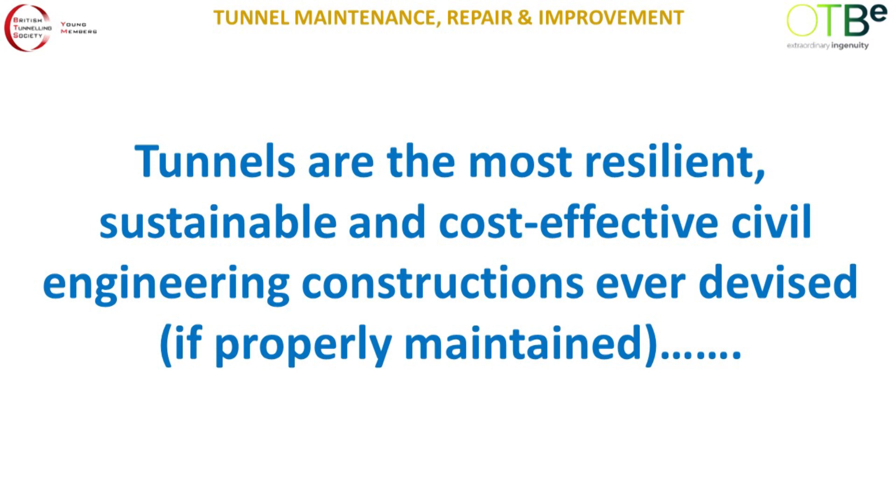So I'm going to start with this statement. It's a pretty bold statement, but it's true. I don't know if you've ever thought about it: tunnels are the most resilient, sustainable and cost-effective civil engineering constructions ever devised, provided they're properly maintained. Not many people think about that. It'd be interesting to know how many tunnels have been built for civil engineering purposes throughout history and are still being used, or are still capable of being used. I'd think you'd find it's a remarkably high percentage.

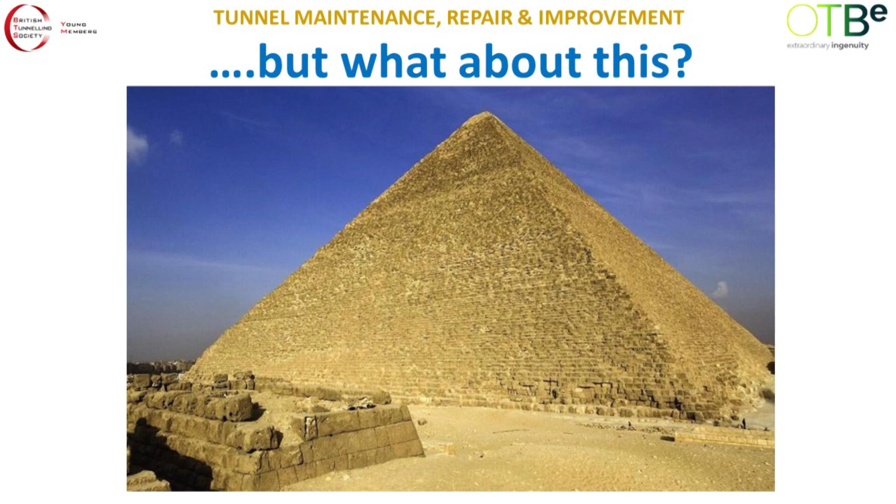But then what about this? It's a pretty bold statement, but what about that thing there? It's pretty old, it's pretty resilient. I wouldn't say it's particularly economic, but there it stands. What about that? Well, it's got its own tunnels, and because the tunnels are underneath the Great Pyramid, they're probably older than the Great Pyramid. It's quite a large cavern, and you can see they've been around for 4,500 years, and they've hardly been maintained at all, and they're still in use as tourists and archaeologists still use them.

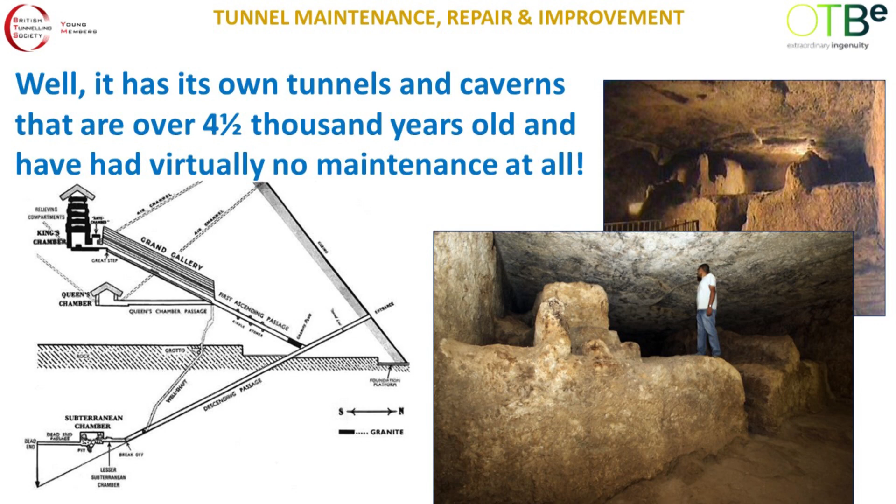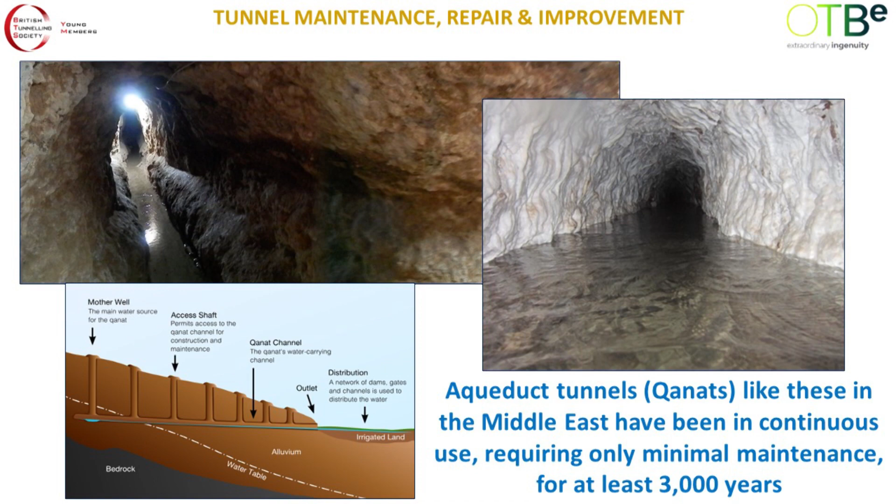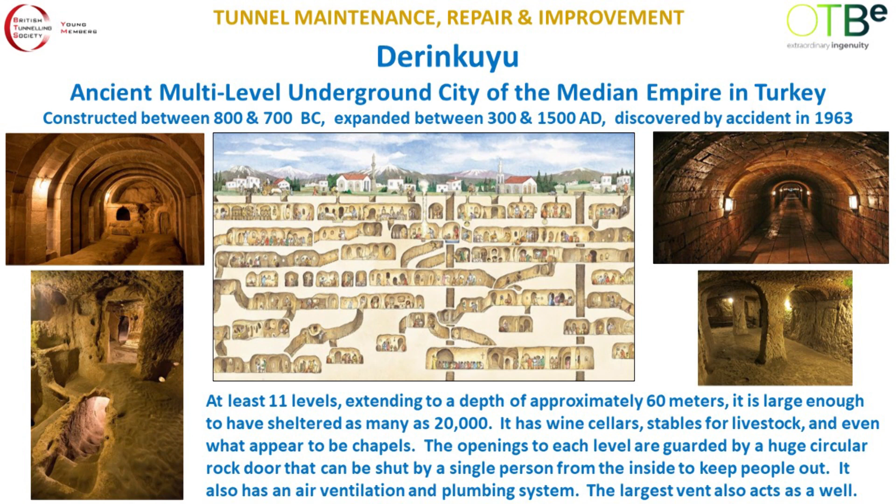And then there's this - there are other examples besides this, but this is a 2,500-year-old underground city, a complete underground city in Turkey that's still capable of being inhabited. It's capable of sheltering as many as 20,000 people. It's got a full ventilation system, it's even got its own security doors. It's an amazing thing, and it's still almost as good as the day it was built.

So those are ancient ones. Let's come a bit further up to date. Let's have a look at this country in particular, since we invented tunnelling - there you go, get that out of the way.

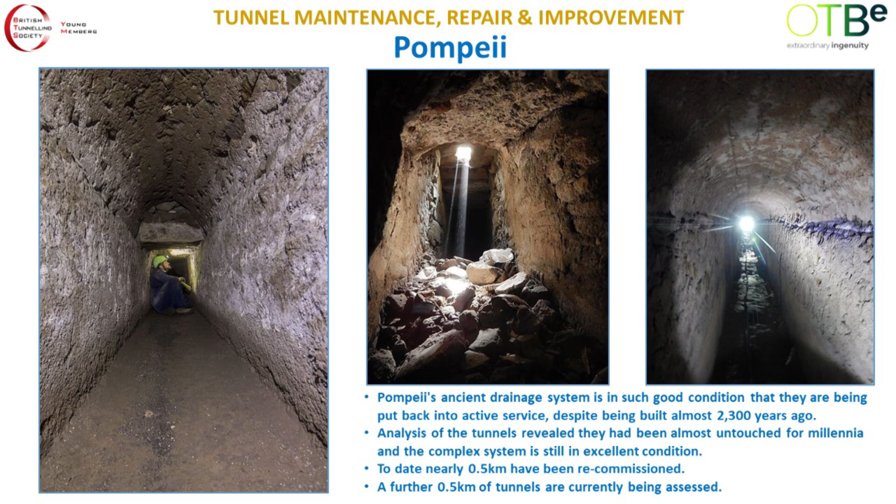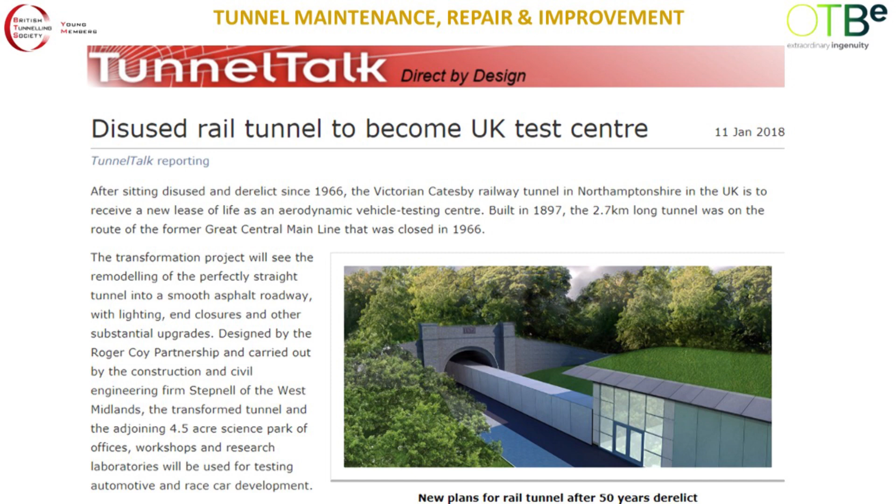This one, I don't know what the status of this is. This was a report in TunnelTalk in 2018, converting this tunnel into a vehicle test centre. I don't know what status that's in at the moment - maybe because I'm a little bit out of the business, having retired, so I don't really follow whether these contracts are coming up. But certainly, it looks like it's a goer, that one. Worth keeping an eye on.

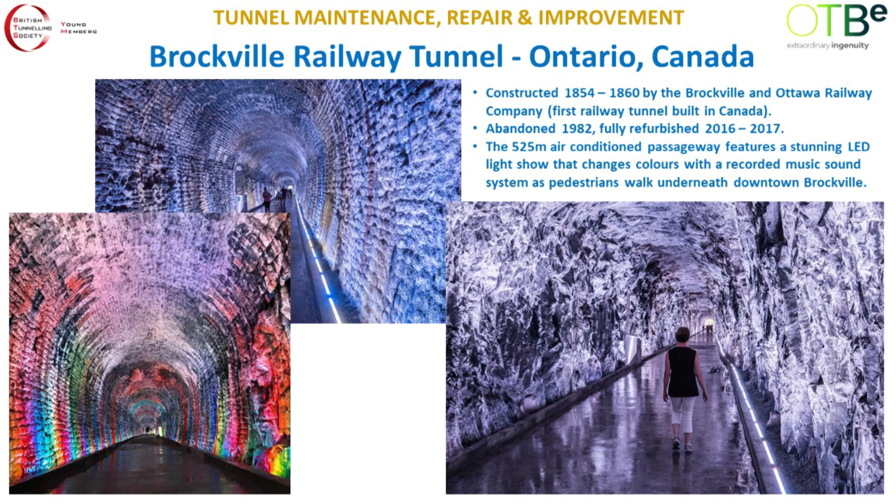That collapse - I went to see it - chimneys almost to the surface. If you look right up into the top with a strong torch, you can actually see the foundations of the terraced house above. They were really lucky in that house too. In the end, this was just infilled with concrete and abandoned, which is a pity really. It's still there, still possible it could be refurbished, and they are talking about refurbishing the old underground line as a new metro for Liverpool.

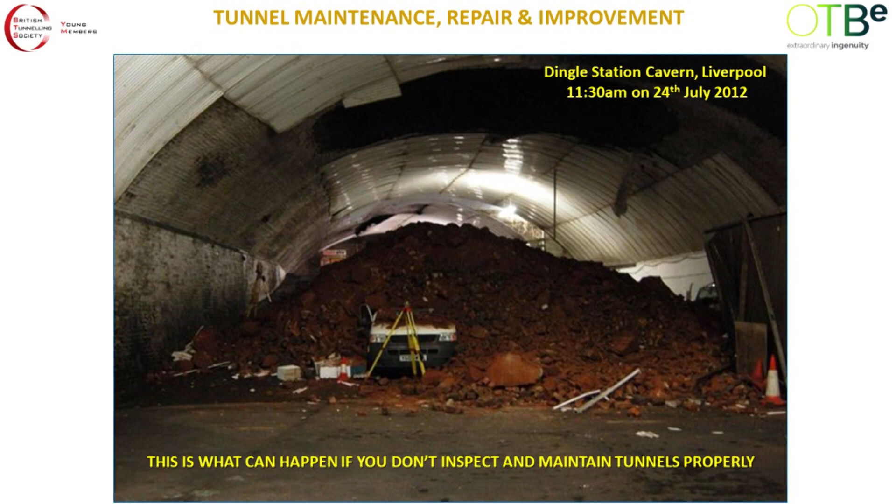So let's have a look at how these tunnels were built. The older tunnels were all built using, almost if they could get away with it, no support at all - just dig the hole, or some very minimal type of support. More commonly stone masonry or brick, sometimes terracotta, used mostly for the finishings. Brick and terracotta with mortar, just plain mortar often used - often Roman mortar or lime mortar. Certainly the brick mortar was often lime mortar or Roman mortar.

Unreinforced concrete came along late in the 19th century. And of course most of London Underground is constructed with grey cast iron, not spheroidal graphite iron, SGI - it's mostly grey, which is much more brittle than SGI. Or this traditional one, steel ribs and lagging, sometimes referred to as colliery arches. We'll have a look at that later.

So these could be used in combination, but often this timber support is left behind. When they put the brick arch in, they can't - it's very difficult to take the timbering down to get the brick in. So quite often they left it in there and just packed stone and rubble around it. Now that this stuff has rotted away, all the weight comes on the brick, and that's probably one of the reasons why the Dingle tunnel collapsed.

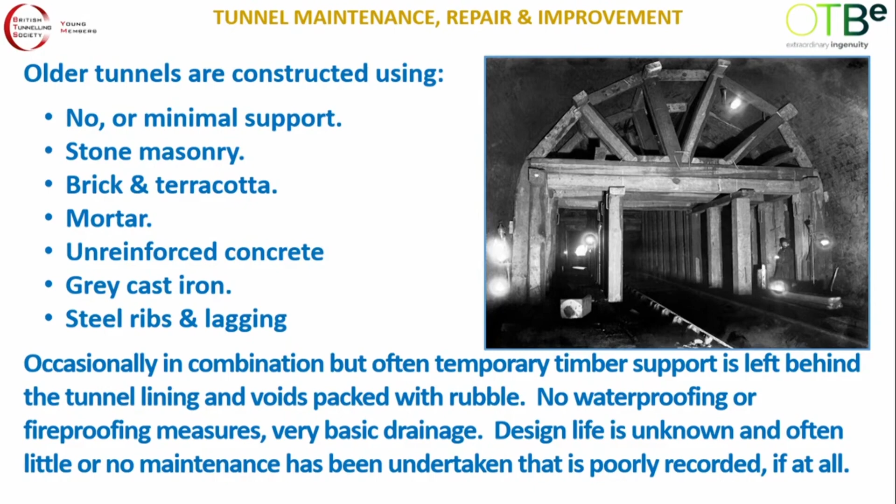Again, often in combination, often with some ground stabilization, much more sophisticated waterproofing, drainage, fire protection, usually designed for a minimum of 120 years in civil engineering. Often requiring only basic maintenance - they're built pretty well in the first place. But sometimes they do employ some of the old methods, like steel ribs and lagging as temporary support - still used, although particularly in America, actually, oddly enough.

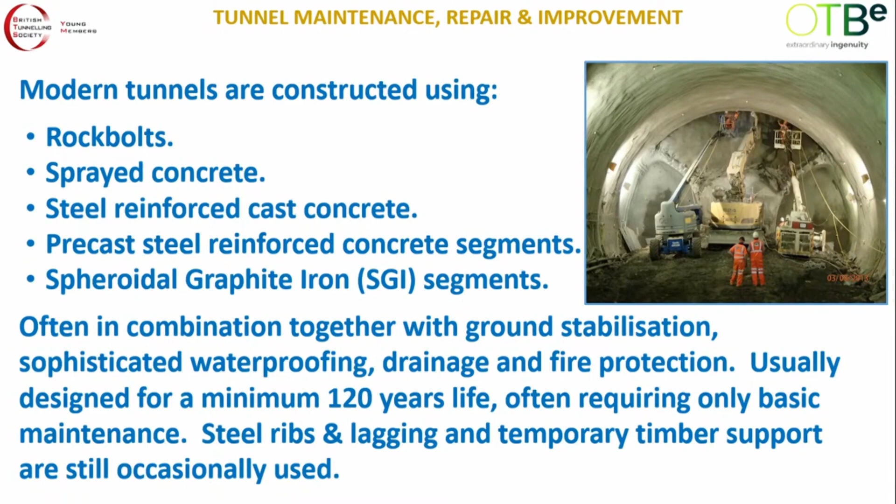So in terms of maintenance and inspection, most of the utilities have their own methods of doing it. Some time ago, the CIRIA organization, along with these good people - some of them have gone now, Metronet have gone, but certainly HSE, London Underground, Tube Lines have gone, Network Rail is still there - put together from their own methodologies this compendium, and it's pretty good. I think WS Atkins actually did the donkey work on it.

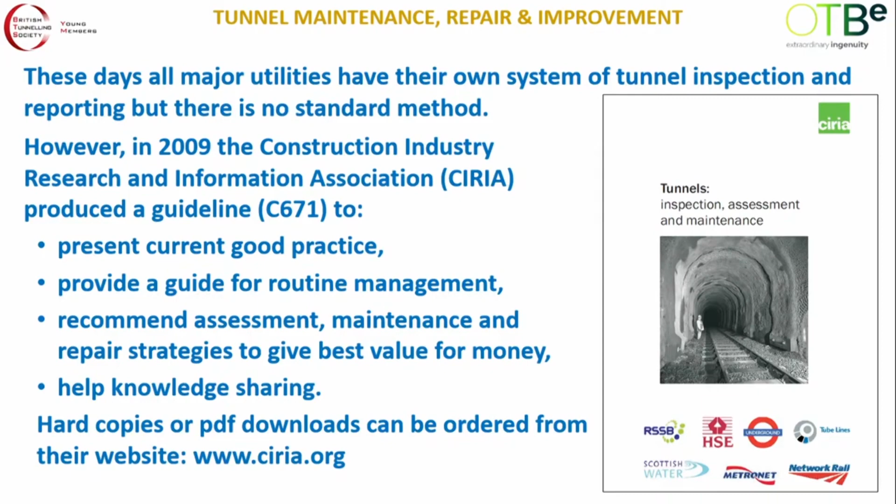But it presented good practice guides for routine management, assessments, knowledge sharing. You can download this as a PDF - it's quite a thick tome, about an inch thick - or you can have a nice paperback copy for your shelf from this website. I recommend that if you're going to get into this part of the profession, to have that one on your shelf or on your computer. Here's a typical maintenance inspection report - this is a typical Network Rail version of it.

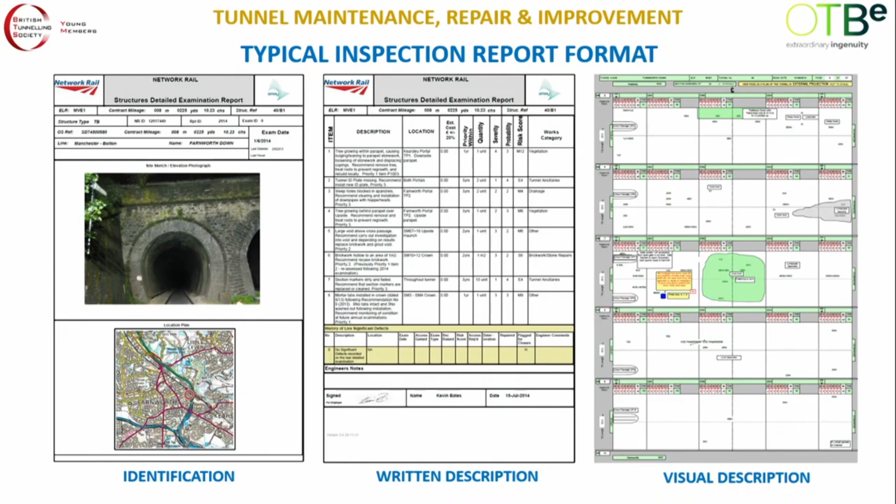Here is a visual report with a sort of scorecard here. Here is a sort of graphical version. There's a developed plan view where you've got the crown and the side walls and the invert.

More recently, these visual inspections are supplemented by things like radar scans, LiDAR, and laser. You'll see that increasingly, and these are getting so detailed now that they're almost like photographs. You can get measurements to less than 1 millimeter now with these.

Profile surveys - they used to use, in the old days, what they called a trammel, which they'd just push in there, like a frame, and measure offsets from it. But now it's done with total stations, theodolites.

Obviously, you need to know what the condition of the lining is, so you do some core drilling through the brick lining. See how many bricks thick it is - has it really got 3, 4, 5 courses of brick? And more particularly, what's behind the lining? Quite often, there's nothing behind the lining. It's just a void, or it's just rotten timber, or it's just rubble.

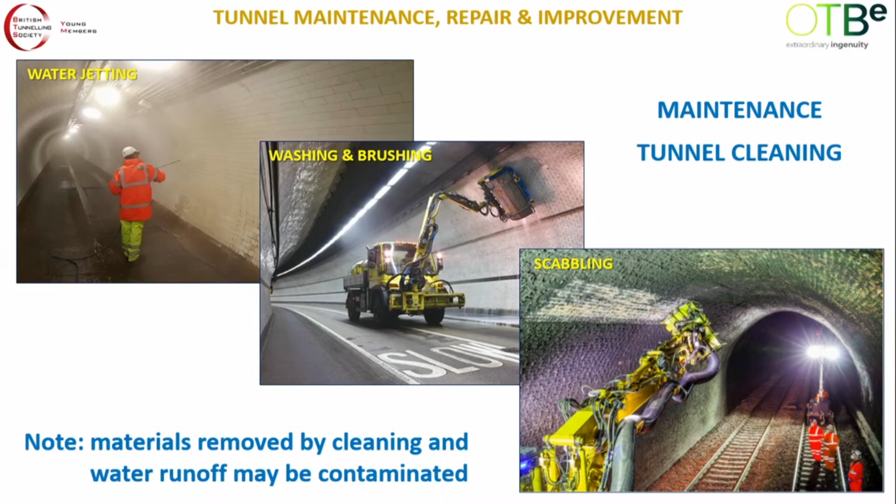This is a new sort of idea with the railway tunnels. This is soot - 100 years of soot accumulation, and of course it covers up the condition. You don't know what the condition of the brick is, so you have to actually scabble the soot off. The soot can be a couple of inches thick, and the problem with that is it's carcinogenic.

So this machine is actually a great big Dyson vacuum cleaner as well, because you have to be careful that if you're cleaning a tunnel, the material that's being taken off and the water runoff can well be contaminated, and you could get into deep trouble if you chuck it into a watercourse.

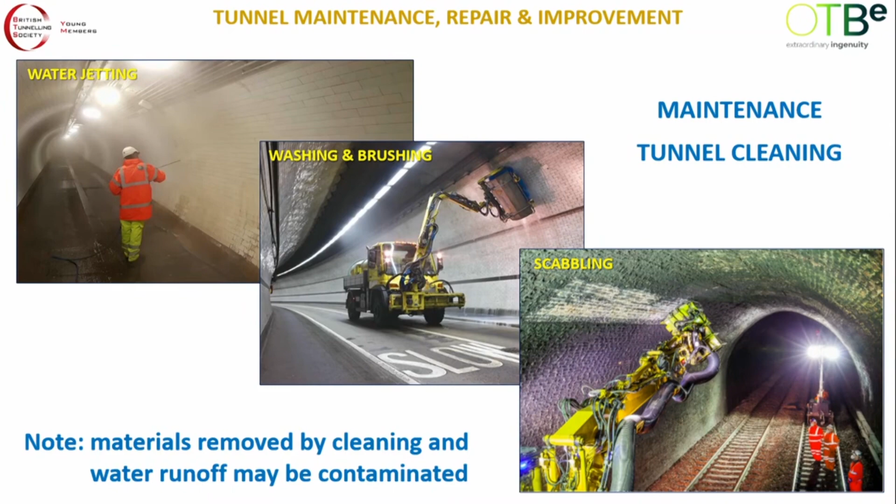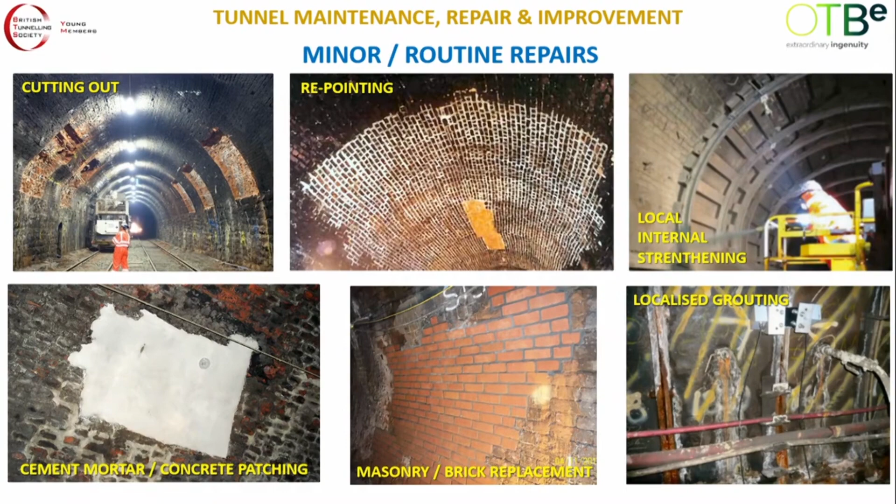Repairs - well, let's look at the minor repairs. Just cutting out the brick. So if you've got more than one layer of brick, well, we can cut out a layer and the tunnel's not particularly compromised. You do it in windows, so at least you do that, and then you infill that and then do that and so on. You wouldn't knock out an entire strip of a course of brick - you'd destabilize that inner lining.

Repointing - just simply repointing is probably good enough. That's done an awful lot on Network Rail.

If you cut out the brickwork, well, you can infill it with cement mortar, or even concrete, or fibre reinforced concrete - that's the main flavour of the year. This fibre reinforcement is very good. A problem with this can be shrinkage, so you want a low shrinkage grout, and the fibres definitely help there.

Or if you're feeling really flush with money, you could actually put new brickwork in there. Certainly, if it's in an area where it's visual, where there are people walking along.

A bit cruder than that may be internal strengthening. These are ribs and lagging, and then it's being shotcreted. But it's only an internal sub-local solution over a short distance. They can get in and do that pretty quick.

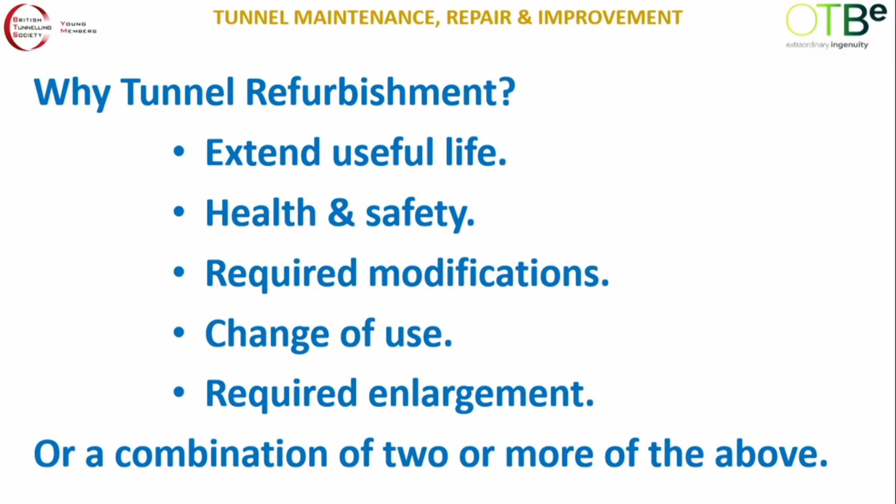Why would you enlarge the tunnel? Well, if you're going to electrify the tunnel with overhead lines, you need space in the soffit, and there may not be any, so you've got to enlarge the tunnel. Or it could be a combination of any of those.

So how would you go about doing it? Well, under the heading of strengthening, fill the void behind the lining - best to fill it up, and the way to do that is to grout it. You could put internal support inside the tunnel, but the only problem is that reduces the gauge of the tunnel. So if all your support's on the inside, you may not be able to fit the train or the traffic through there.

Ground anchoring - some big examples of that have happened, particularly the Severn Tunnel, a huge contract for ground anchoring before they could reopen that tunnel. And underpinning, strangely enough - you wouldn't think you'd do that with a tunnel, but it is done. We'll have a look at some examples.

Relining - you've got a pretty good arsenal these days for relining. You can use spray concrete. This is a specially designed carriage where the guys applying the shotcrete are protected from the live railway alongside it. When they're actually working, the ends are screened off as well - you can see the bag is inflated at the top, and these flaps come down, so the thing is sealed off and the guys are working in safety. That's being tested on Network Rail now.

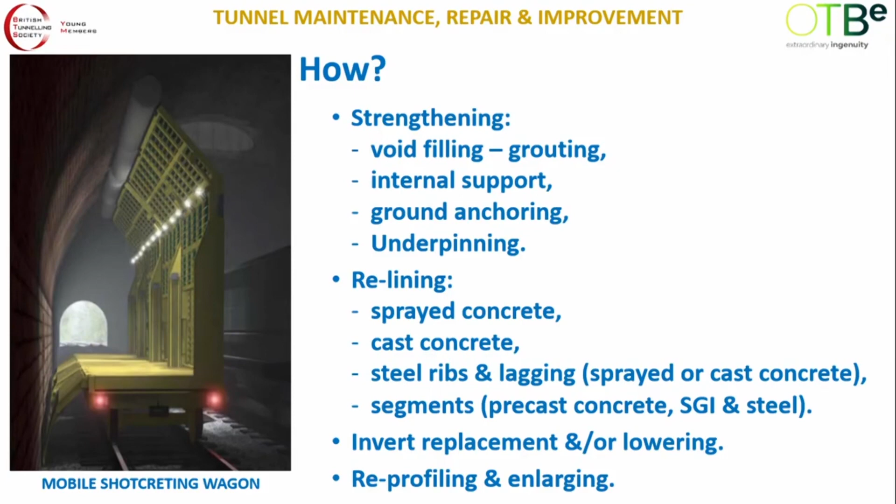And obviously just completely reprofiling, relining and enlarging - that is where the big money is. Some big contracts being done recently in that, and again, Germany is going to lead the way in this. We'll have a look later why.

So, void filling and grouting. As I said, behind these brick linings - the brick lining is a bit like a cheap suit, it fits where it touches - so you've got these voids. These could be filled with rubble or rotten timber.

When you grout, you drill holes in the lining at regular intervals, and you start the grouting from the bottom and progress upwards, bleeding the grout as you go and sealing these as you go, until you finally get to the top and the grout bleeds out. So you've got to do this in a fairly controlled sequence, not just circumferentially, but laterally as well. And of course, the drill rigs can be pretty big, so it can be a bit of a problem fitting this into a tunnel, especially an old confined one - especially when you've got the HSE on your back wanting all this caging around the drill as well.

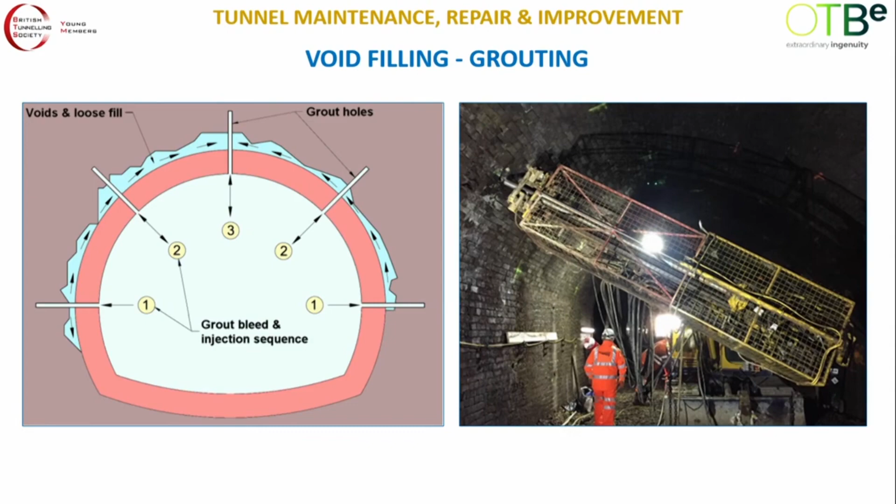Internal support with steel ribs can be done just to temporarily stabilize the lining. That's the steel ribs, with timber lagging behind it. You can see the brick or masonry behind the lagging, with steel ribs and tie bars. Even here they've got crown bars and horse heads and all that good stuff. You can see here that the tunnel is in a pretty bad condition just a little bit further along.

That was Standedge Canal Tunnel, completely refurbished about 15, 20 years ago. In its day, the longest canal tunnel in the world. It was a pretty impressive undertaking for the end of the 18th century, built in the 1790s.

This here is a more modern version of what's being proposed for this Queensbury cycleway, using steel arches as a permanent support on the inside. Not too worried about losing gauge for cycles, so we can do that. If it was a railway tunnel, that might not be possible.

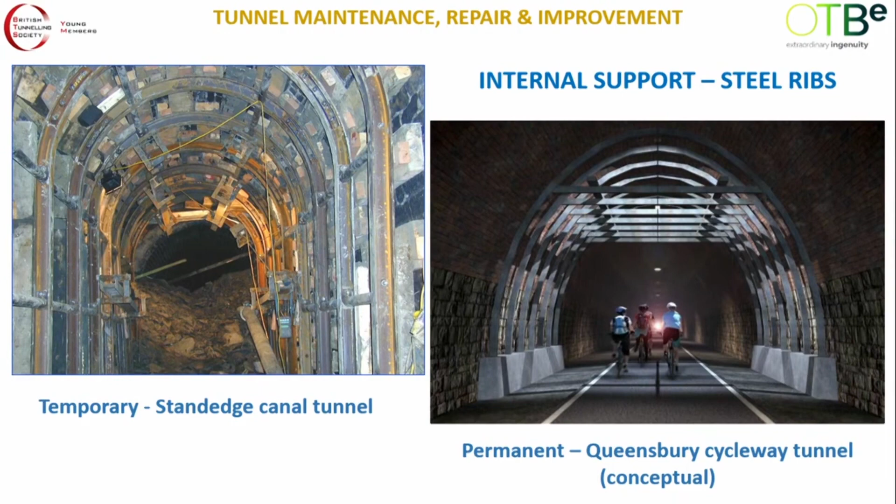This is a new idea. I want you to pay particular attention to this because this is my pension. This is called RamArch. It's now the method of choice for Network Rail for doing internal strengthening.

These are steel mesh panels which have been deformed, so you can see it has a sort of lattice girder incorporated into the mesh. They come in 2 meter long by 1.3 meter wide panels, and you simply bolt them together at these points here, and you make an arch.

The arch arrives on a pallet, so one pallet, one arch. It's assembled on a cradle on the ground, lifted up into position into the roof, fixed in place and overlapped. Each arch is overlapped by 0.3 meters, 300 millimeters, so each arch is actually 1 meter long.

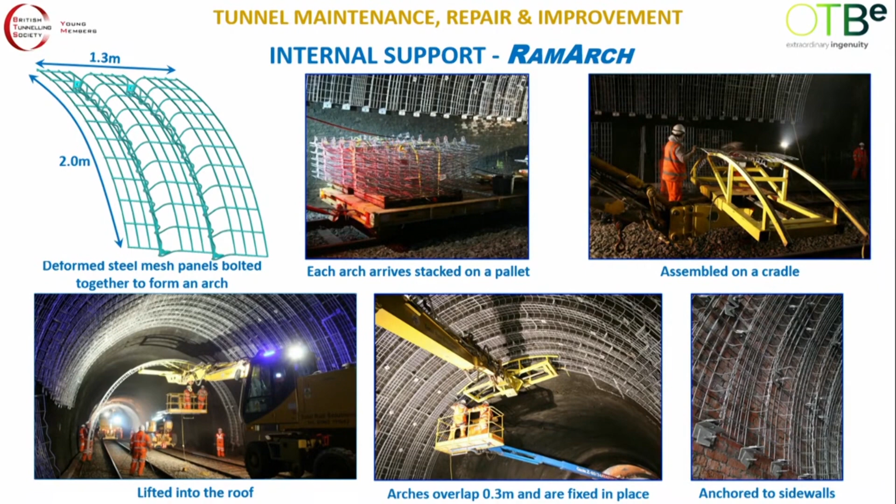It's fixed at the bottom, anchored to the side wall, mainly to prevent further delamination of the brick lining. But later you can just apply shotcrete, and you've got yourself a reinforced concrete lining.

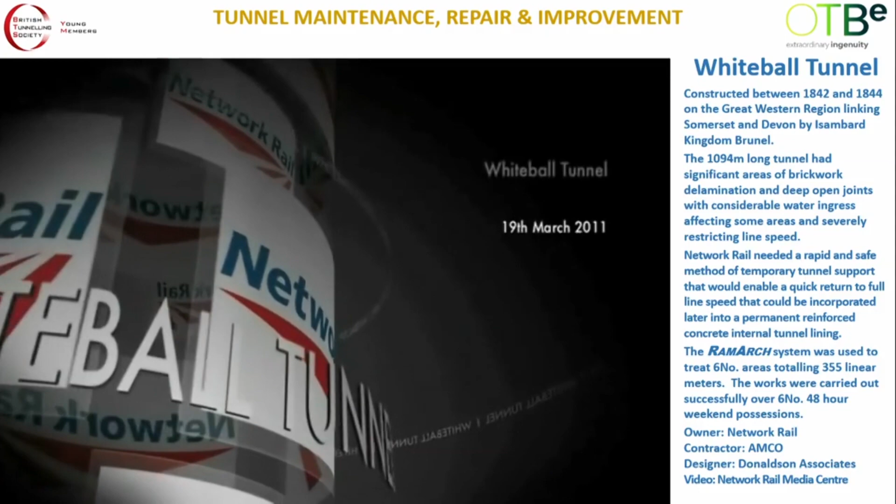There's a video here now which will show you how it was actually built. This was Whiteball Tunnel, the first one built with this material, back in 2011. So far there have been nearly 24 jobs done with it, and you can see how quick it is.

Network Rail were looking for this - it was developed specifically for Network Rail at their request. They wanted a system that they could get in and stabilize a tunnel in engineering hours or a weekend possession - get in, get out - and they also wanted a system which was safe for the men to operate in the tunnels.

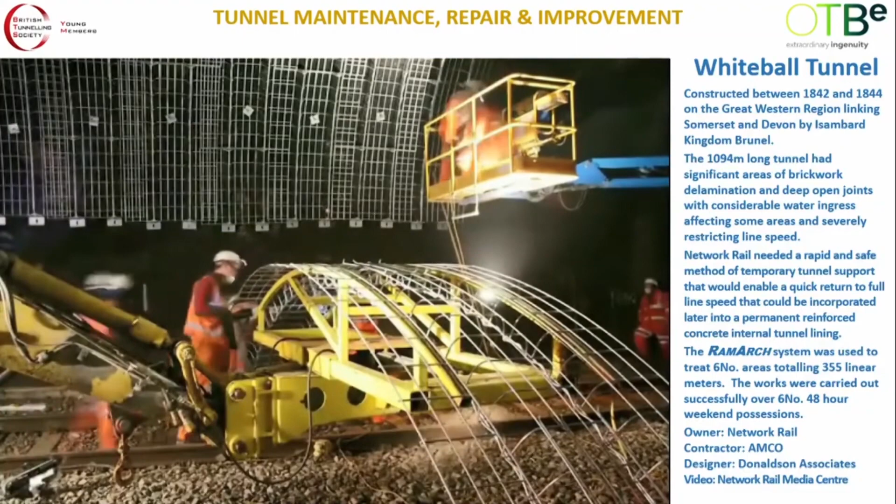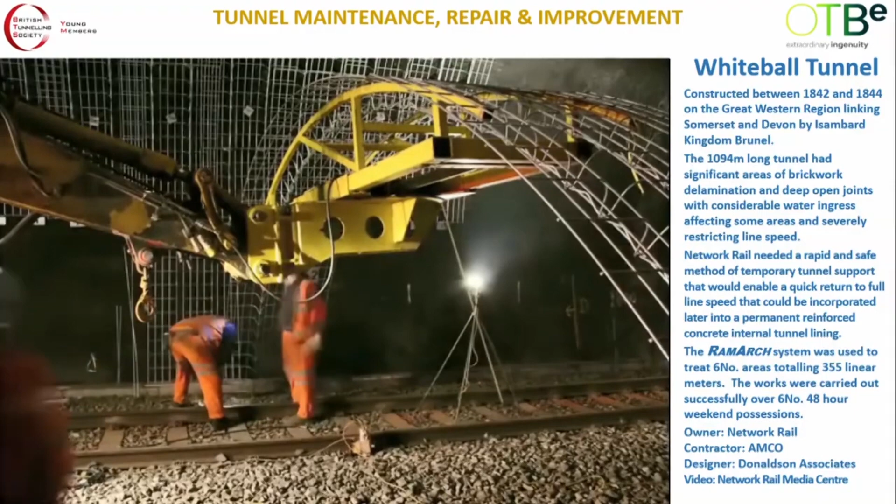Now you see they're assembling the arch standing on the ground, so all the bolting and attachments are done standing on the ground. These are stiffening and connecting ribs, rebars, which are again attached on the ground. As they attach each panel at the bottom, it's pushed over the top of the cradle and lifted up into the soffit. Once it's up there, the guys go up and fix it in place in a cradle.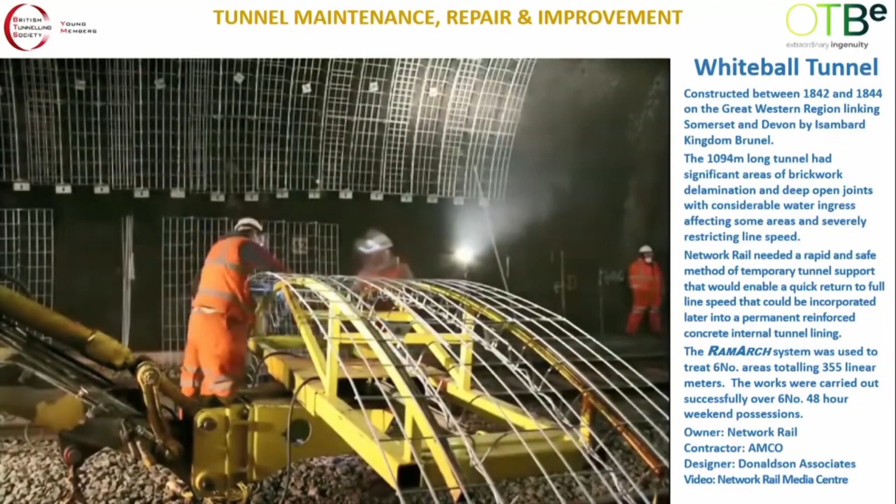The more modern, up-to-date version of this has expansion joints, and the arch is expanded up into the soffit. Just have a quick look at it again to get the idea.

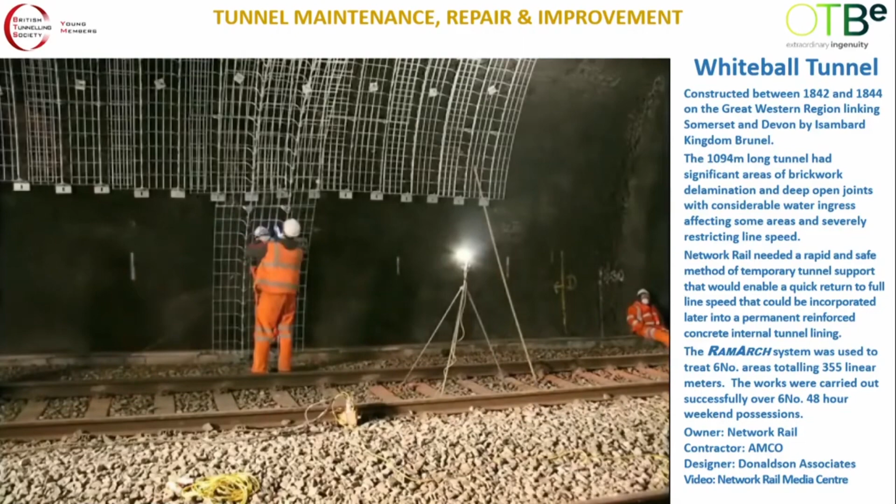It is pretty quick - not that quick, but you can do an arch in about 10 to 15 minutes, so you're advancing a meter every... you can do 4, 5, 6 meters in an hour.

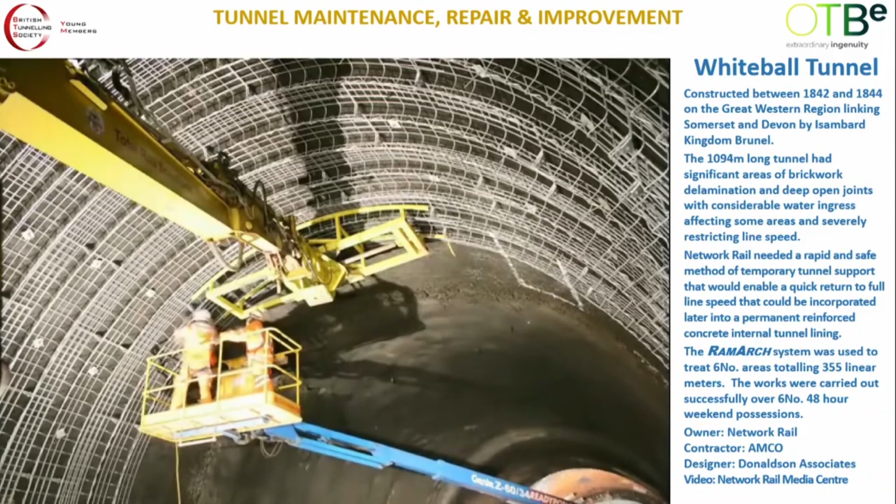You can see down the other end of the tunnel - you might have seen there was another complete operation going on as well at the same time.

That's Whiteball Tunnel. Again, it's another Brunel tunnel, so it's pretty big. It's down in the West Country, built in 1850-ish, and never been maintained until now. In fact, there is a contract out, or I don't know whether they're doing it now, to actually put the shotcrete in.

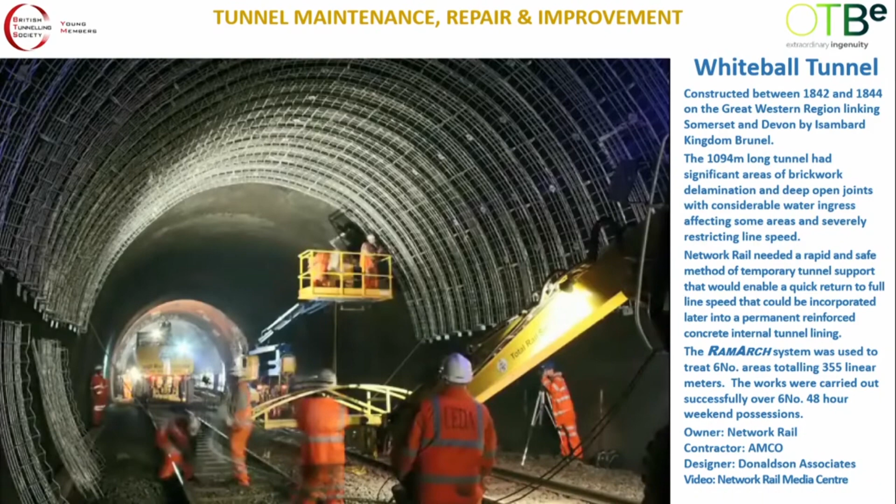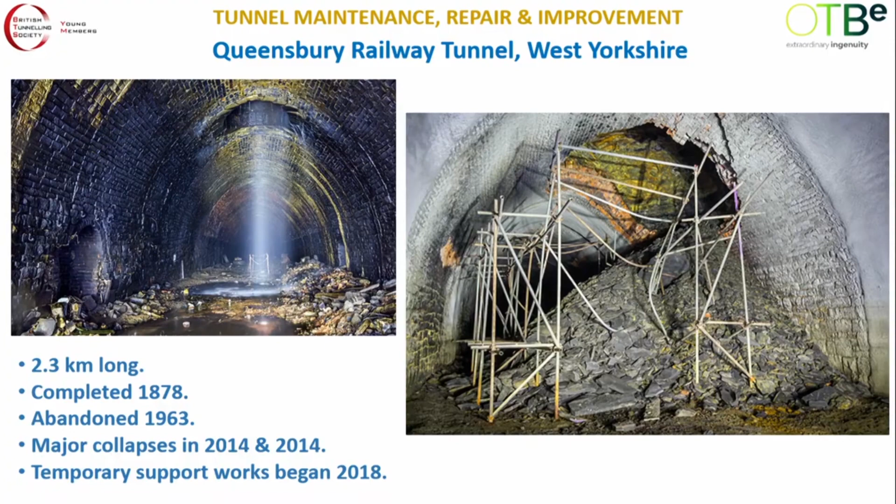This is one more recently done with Ram Arch - Queensbury Railway Tunnel. You might have read about this, there's been a bit of controversy about it. It's over 2 kilometres long, abandoned in 1963. There were some big collapses, I think it was 2014. Temporary works on this tunnel began in 2018, and they were finished around Christmas last year, using Ram Arch.

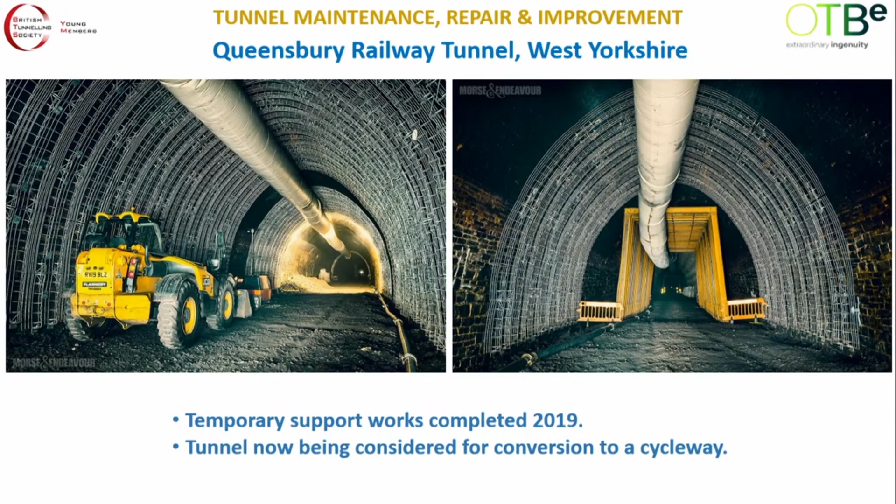This time the Ram Arch is taken right down the side walls and is founded on the base. There are quite a few sections of this done. The question now is whether it's being considered for conversion to a cycleway. There's huge support for this, but it's not going to be cheap to convert this tunnel. Unfortunately it gets flooded, and the landowner is holding out for a lot of money. But I think it will get done eventually - it's too good an opportunity to miss, and they've spent a lot of money stabilising it to just abandon it now.

So the other method is ground anchoring. The Severn Tunnel, as I mentioned, constructed in 1886 by Hawkshaw, and refurbished in 2019, ready for the electrification which is now in place to Cardiff. So a massive program of anchoring went on there, a bit similar to this one here.

This is Abbotscliffe Tunnel down on the south coast near Dover, done in chalk. This is a similar hole pattern to the Abbotscliffe Tunnel, I think designed by Donaldson's Covey. This one is Standedge Tunnel again - we saw the steel ribs lining. This is where it was anchored in the roof with steel mesh and long rock bolts.

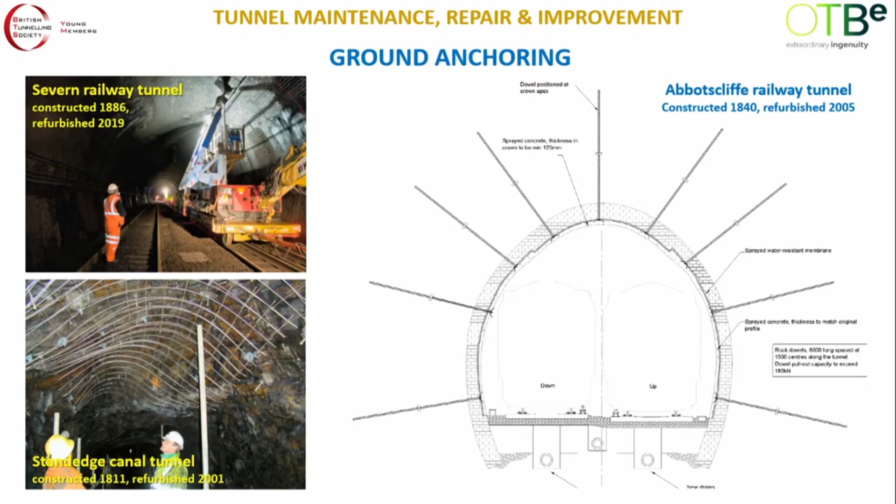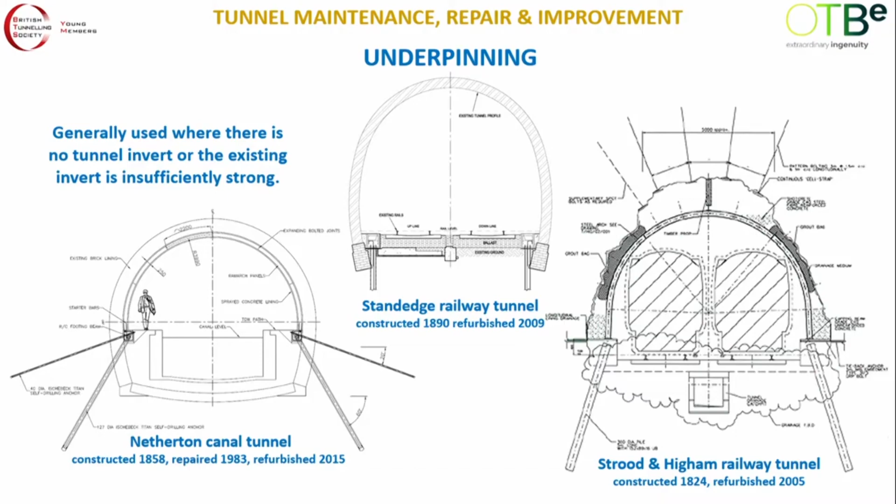Sprayed concrete, good old shotcrete - what can I say? It's pretty extensively used now for tunnel refurb, just simply either sprayed on the brick to bind it together. This is Sugarloaf Tunnel down in South Wales near Abergavenny, and you can see the shotcrete has been formed into ribs. There's quite a paper written about that - there was a presentation given here when that was built back in the 1990s.

Netherton we just mentioned - that's Netherton in progress. This is a barge underneath here with a flat back top on it, giving a working space to build the reinforced concrete lining. Whiteball, that's the RamArch there, and this is it being shotcreted. That's the sort of finish you can get - you end up with a reinforced concrete tunnel lining.

This is quite an interesting one I did years ago, which I thought I'd put in, very interesting - this is Byera Hill in St Vincent. Not a very big tunnel, but very, very interesting. Built in 1811 by plantation slaves, no support whatsoever in it, but starting to show its age, and heavily used by locals - actually a main thoroughfare. This was refurbished in shotcrete by Shotcrete Services Limited, British.

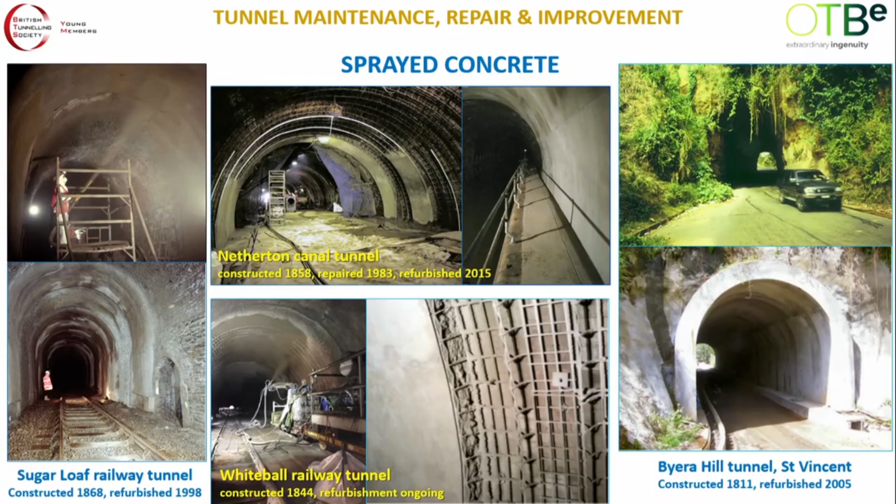And the arch, that is actually done in shotcrete, believe it or not - it's not cast concrete, that is shotcrete. So it shows you what you can do with shotcrete. They did a few other tunnels like that in the Caribbean. Now this is the famous one - I was involved in the early stages of this.

It's the Brunel Tunnel, the famous Marc Brunel Tunnel, Isambard's father. Isambard finished it off, but Marc came up with the idea in the first place in 1825. He devised the world's first tunnelling shield. There's been a lot of presentations about this, you can read up about it, there are books written on it.

Basically, it was getting in a terrible condition. The old terracotta lining was completely stripped out, as was the track bed, and the internal finishings were done in cast concrete. The cast concrete had to match the original finishes done in terracotta and plaster, so you can imagine what that cost. It cost a fortune - the contractor and the consultant walked away with big smiles on their face. But you can see how intricate the shuttering was, pretty amazing for this.

And then as soon as they'd finished it, they had a dinner in there, and then they covered it up with all the cables and signalling, and then you can't see it anymore. I think the Brunel Society have a walkthrough every year, might be interesting. If you go to Wapping Station and peer down into the gloom, you can see a little bit of it, unfortunately not visible in all its glory, and you'll never see that again. When it was finished, it was absolutely magnificent.

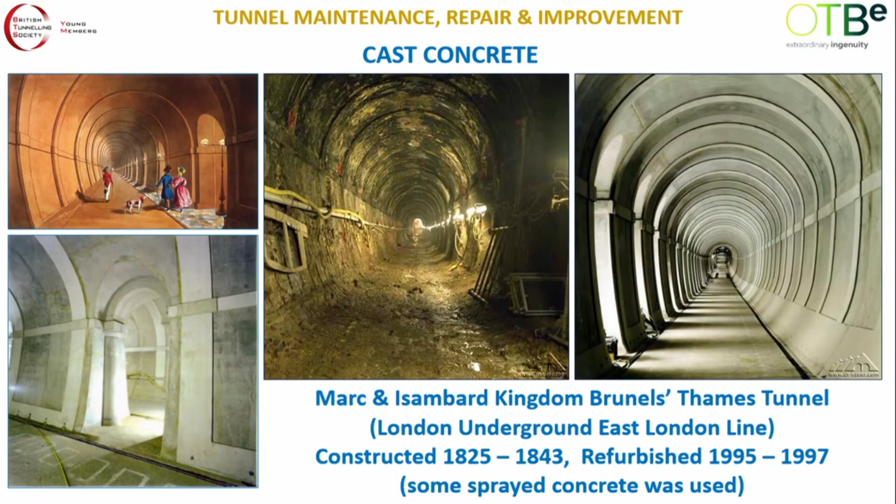Some sprayed concrete was used on that job, but not much. I think the sprayed concrete had fibres in it - Bekaert fibres, Dramix, of course, just to keep him happy. So this is where steel ribs and lagging is used to replace the lining, not as an internal support. The lining was actually cut out and replaced with steel ribs, and then shotcreted in between the steel ribs and over the top of the steel ribs. I think they cast the sides - I'm not absolutely sure about that. It may be shotcrete that's just been rendered.

But a nice job. This is up near Burnley, between Burnley and Todmorden up in Lancashire, the Holme Tunnel. Done a few years ago. Designer, I think, was Donaldson's again. In between the ribs, they used ram arch because they were worried about bits falling out.

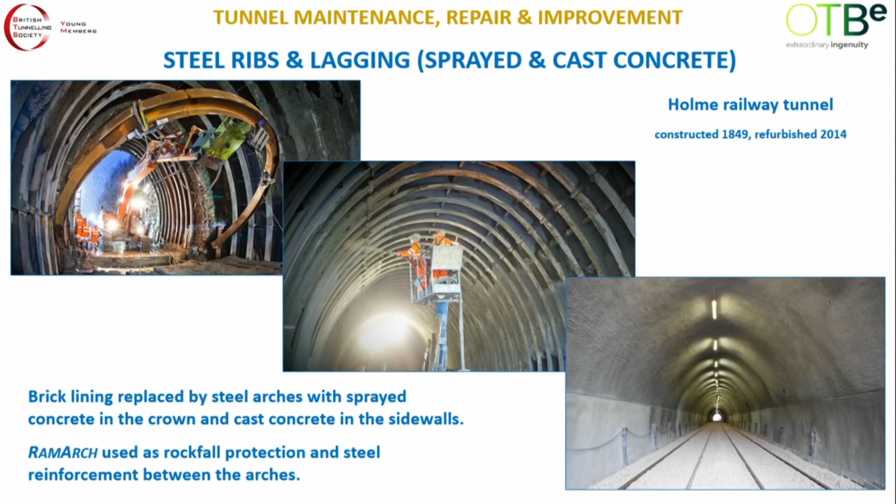Here's some interesting jobs - there's one man in the audience who recognises these. Blisworth Canal Tunnel - here they replaced the linings with segmental, old-fashioned segmental tubbing segments. There was a bit of a vogue for doing this at one time with the canals. There was up in Birmingham, they did some of these.

This is a very interesting job here, and the man who did this is sitting - there he is, white-haired man up there. Yeah, this is actually on the Northern Line, at Old Street. The original grey cast iron was rotting away because acidic water was seeping through the lining and rotting it away. So the lining was replaced by stainless steel segments - imagine what that cost. But the most interesting thing about this is it was done behind a mobile shield, so the train traffic actually kept going. So in engineering hours and at weekends, they replaced the lining, but the traffic through the tunnel was not interrupted during the week. That was a world's first, that.

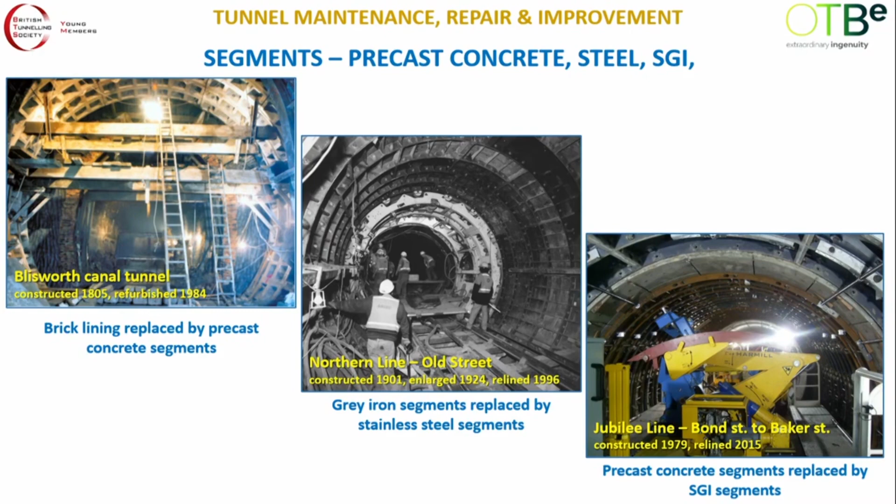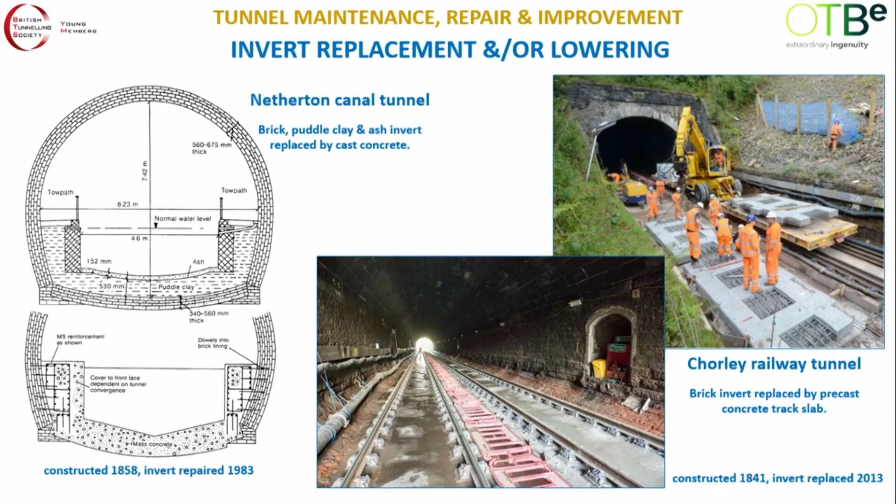Invert replacement, as I mentioned - instead of trying to increase the height of the soffit, you can simply chop out the invert and install a thinner track slab. That was basically to get more headroom for the railway. This is Chorley tunnel up in Lancashire, or again at Netherton, same problem. But here, what was happening was they were losing gauge because the invert was being forced up by ground pressure - they had what's called bottom heave, that's an old term for you, you look it up, bottom heave. And what they did was they took out the brick and puddle clay linings and replaced them with mass concrete. Done in 1983, a bit before the ram arch stuff was done.

Coming to the end now - reprofiling and enlarging. Timing - oh, good timing.

Reprofiling and enlarging, this is going to be the big money in future. You're going to see a lot of this, mainly because if you want to electrify railways, or increase the gauge for continental loading gauges for roads and so on, you've got to make the tunnels bigger.

It's even in America. This Berry Street tunnel in Pittsburgh, a very old tunnel from 1865, was enlarged in 1997 using, dare I say it, NATM. I've got to say that in dulcet tones in this august institution.

But it was enlarged using NATM principles, assuming this was basically a pilot tunnel. So it was done with lattice girders, rock bolts, shotcrete, done in 1997 by the Dr. Sauer company. You can see the brick lining being ripped out here, and the lattice girders and shotcrete going in straight behind it.

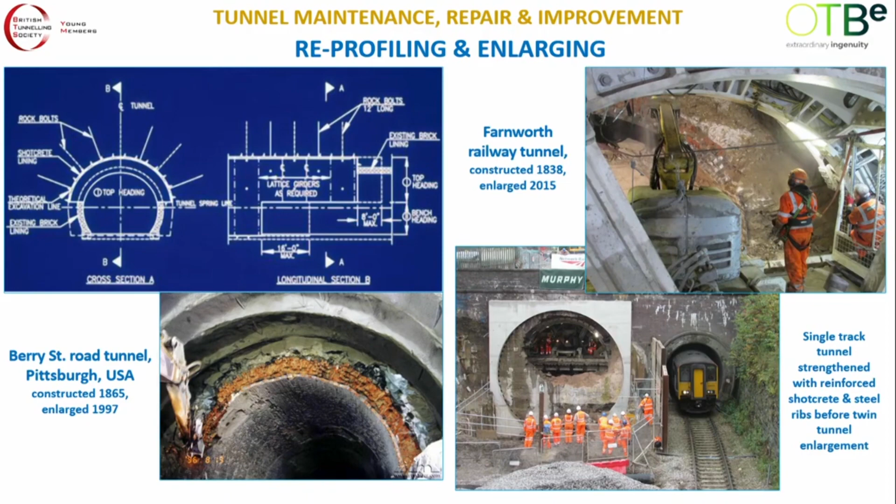Yeah, you got to mention the Germans, I suppose. Of course, they're in on the act, and they've mechanised it. Good old Herrenknecht, he's in there. This is a tunnel enlargement shield, so keep the trains running, and basically a fully mechanised shield and TBM that rips out the lining, enlarges the tunnel, and then shotcretes it. Job done. That's going to be the future. It really is.

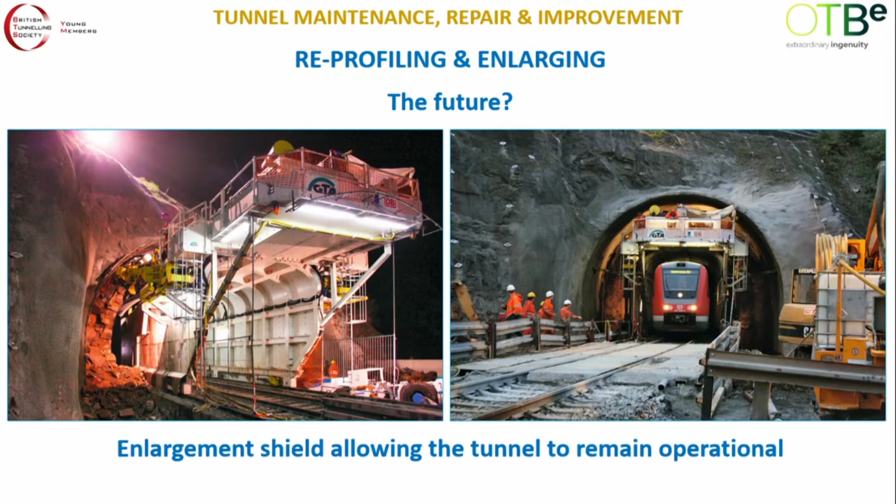Finally, this. I'm a bit disappointed with this, because this is a really excellent report written by a guy called Gerard Quigg, who was a BTS young member when he wrote this report. It's one of the best reports on the subject I've ever seen, and it reviews all the methods used to enlarge tunnels with case histories and so on.

The idea being that this report, done by TRL, was going to be a decision-making tool for Network Rail on what they're going to do about enlarging railway tunnels. It was done a couple of years ago so far, and it's never been taken up, and I don't know why.

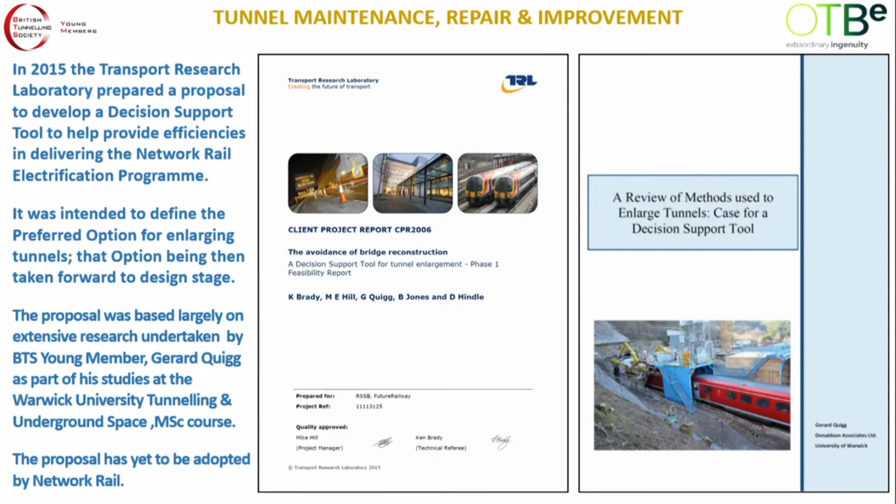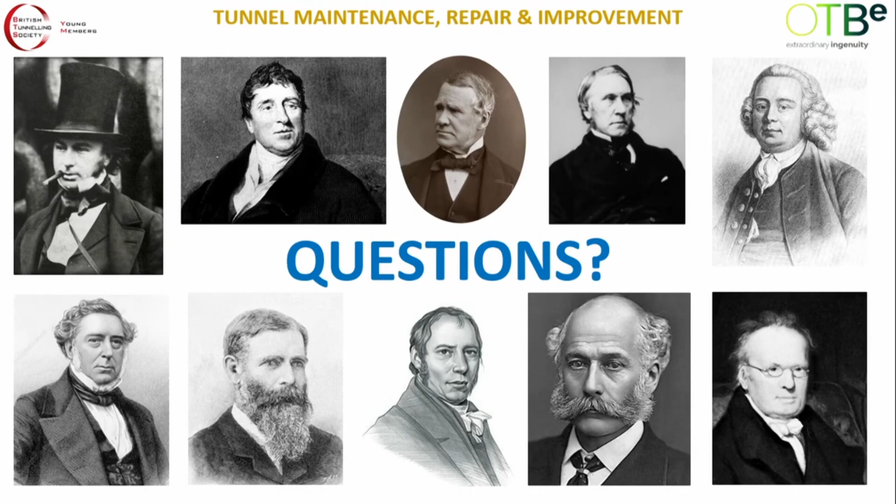Okay, so that's the latest thing, and believe me, that's going to be the future. So having said that, we're left with a lot of questions. So while you ponder questions, you can figure out who these hairy people are. Some of them are mentioned around this room. None of them are quite as old as me, but there you go.

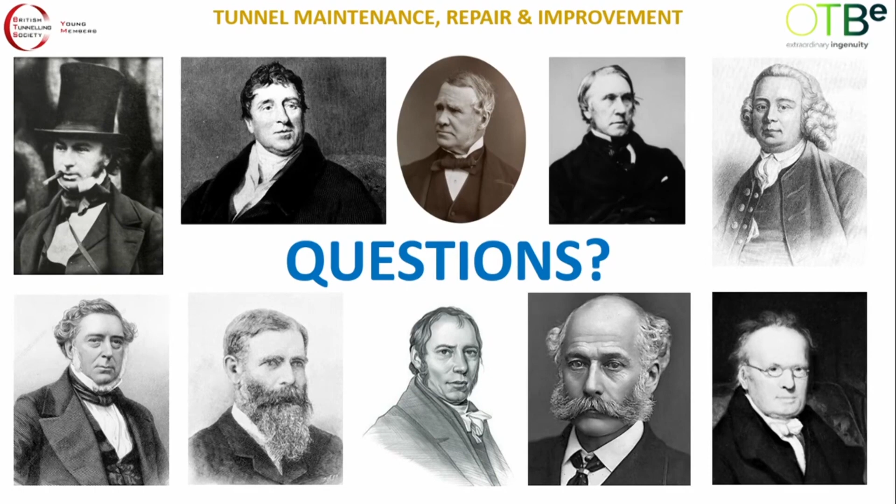Hi, thanks for the presentation. Just a question in regards to tunnel maintenance, repair, improvement, at least here in the UK. I'm from Australia, as you can probably tell by the accent. How much consideration is given to durability, particularly when you're using reinforcement steel in shotcrete, and you're wanting 120-year design lives? I know there's a lot of consideration given to the structural aspect, but what about durability of the materials being used?

That's a good question, that. It depends on who your client is. Network Rail don't always require 120 years. It may not even be possible, because there's not enough space, often, to get the required cover to steel, for instance. You do aim for it as long as possible, and if you can do 120 years, then do 120 years.

I would think if it's a lining replacement, where you're chopping out the old lining and putting in a new one, certainly the Farnworth Tunnel, that was 120 years. But where you're doing patching up and just general maintenance or repairs, well, they may only be interested in extending the life of the tunnel another 20 years and then do it again. Because remember, you close these tunnels off, and it's big money involved.